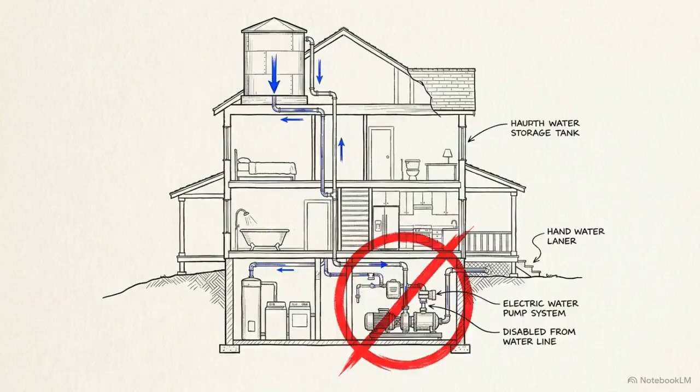When you use a gravity-fed water system, you aren't relying on an electric pump. You're relying entirely on the raw physical weight of falling water to do the work. This setup runs on energy stored by height.

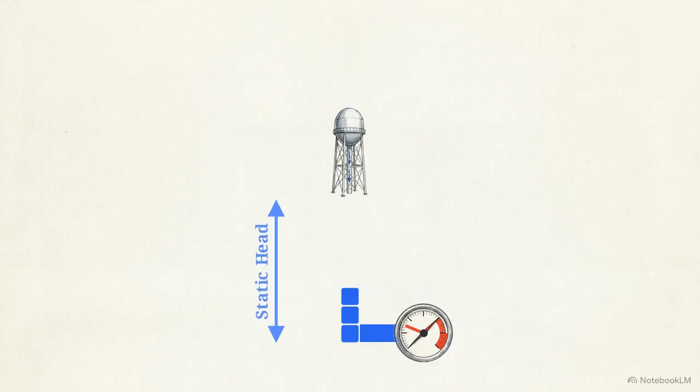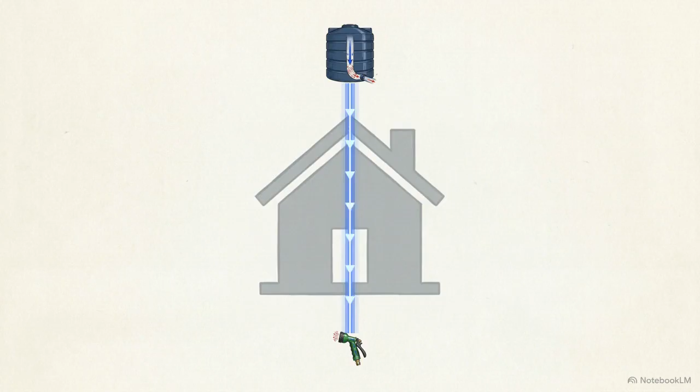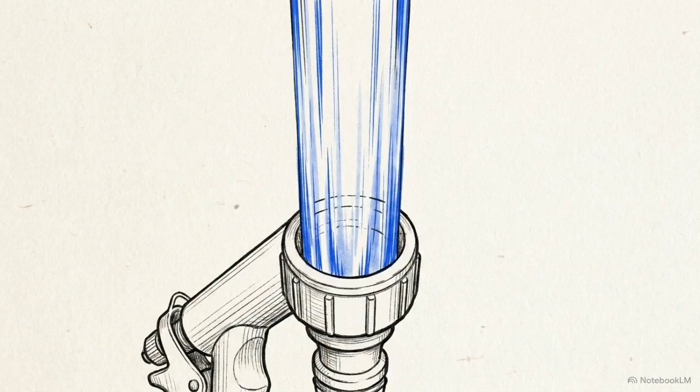The higher you place your water tank, the more heavy water stacks up inside the line, which means more pressure at the bottom. In a perfect world, your plumbing would be a single, perfectly straight vertical pipe dropping directly from that roof tank down to your garden hose. In that uninterrupted straight-line state, gravity acts as a flawless engine, delivering the most water pressure possible right to your destination.

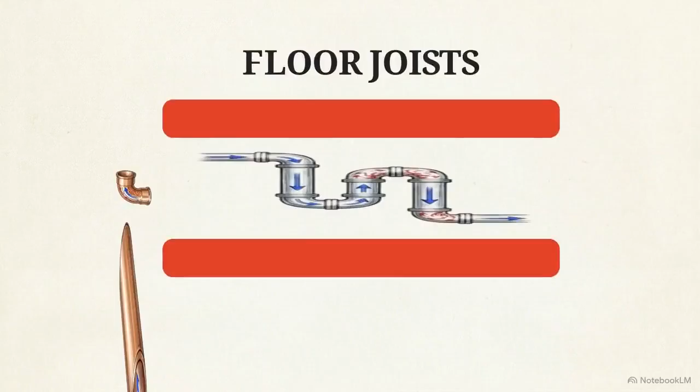But our homes aren't built in perfect vertical lines. To get water where it needs to go, pipes have to navigate around walls, dodge under foundations, and snake through tight spaces. To navigate these obstacles, we use a standard 90-degree pipe elbow, the universal solution for turning a corner.

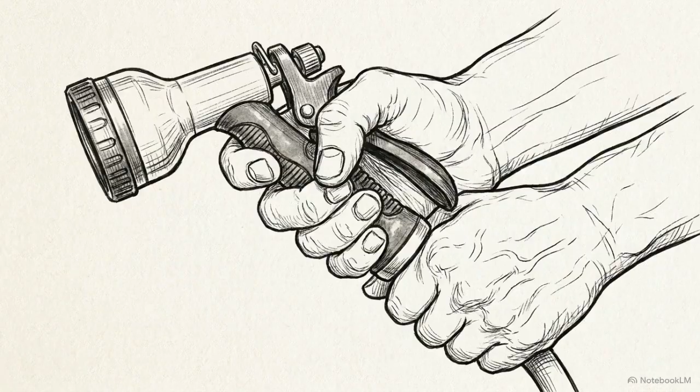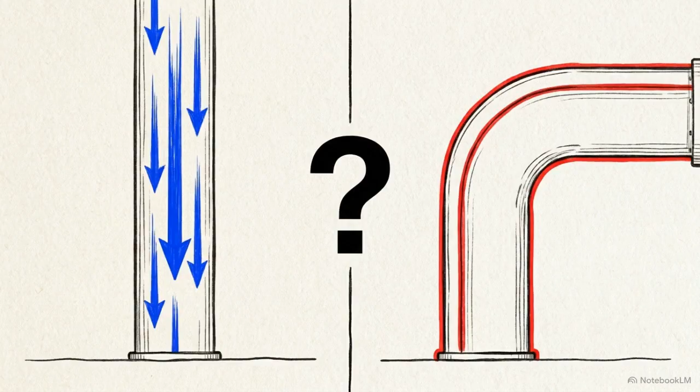And we've all experienced the frustrating result. You have a full tank of water on the roof, but by the time you actually open the hose, that pressure has vanished, leaving only a weak trickle. Why does the powerful engine of gravity suddenly fail us just because a pipe takes a turn?

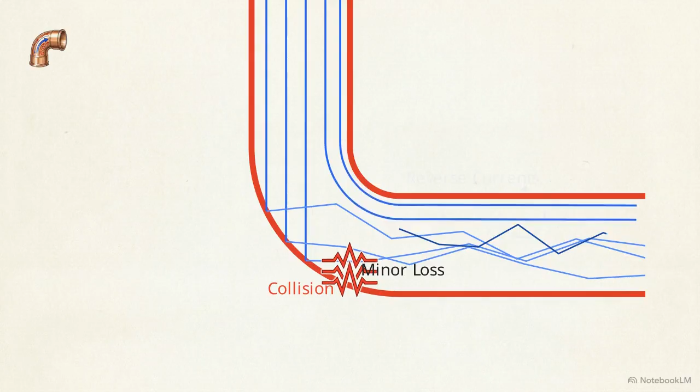Inside a 90-degree elbow, water flows rapidly toward a sharp corner. It cannot bend smoothly. Momentum carries it forward until it violently slams the outer wall. This crash creates turbulence. Water breaks into swirling eddies and reverse currents that actively fight the incoming flow.

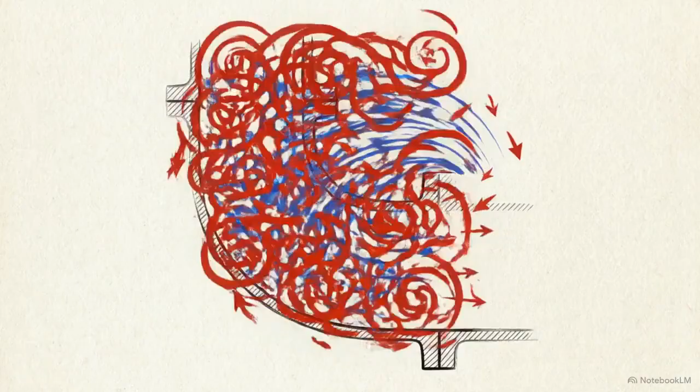Imagine driving on a fast-moving highway and being forced to make a sharp 90-degree turn onto a narrow city street. You have to slam on your brakes. A 90-degree elbow is a friction-generating braking zone. It actively consumes the energy the water spent falling from the roof, robbing it of its speed.

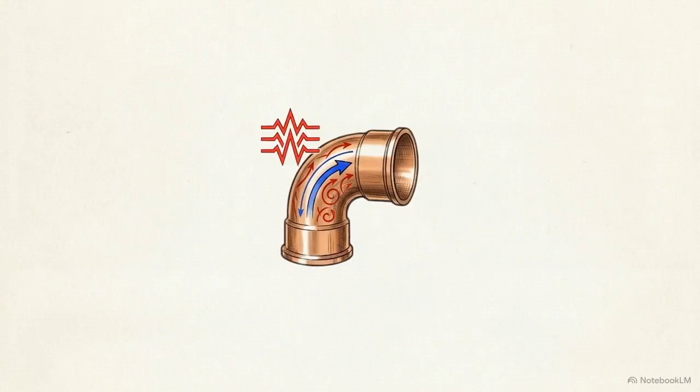There is a way to picture this loss by comparing it to a straight path. We call this the equivalent length. It works by taking the energy lost in just one turn and stretching it out, transforming that single elbow into a long, straight stretch of pipe.

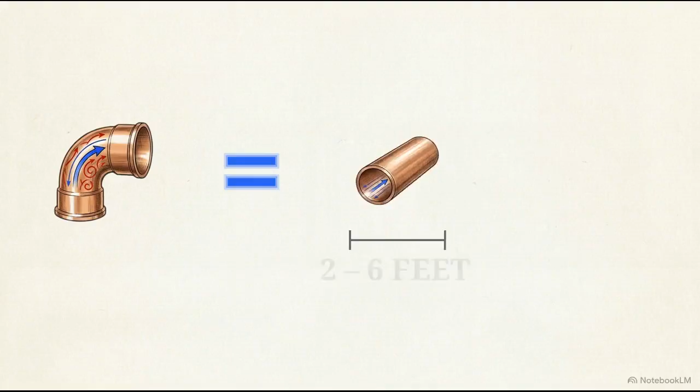Depending on the size of your pipes, passing through a single 90-degree turn is the same as traveling through 2 to 6 extra feet of straight pipe. Every elbow you install adds invisible pipe to your system, forcing gravity to push the water much further than the actual distance suggests.

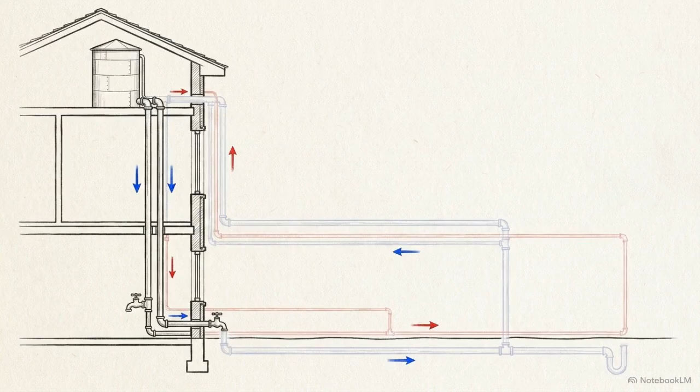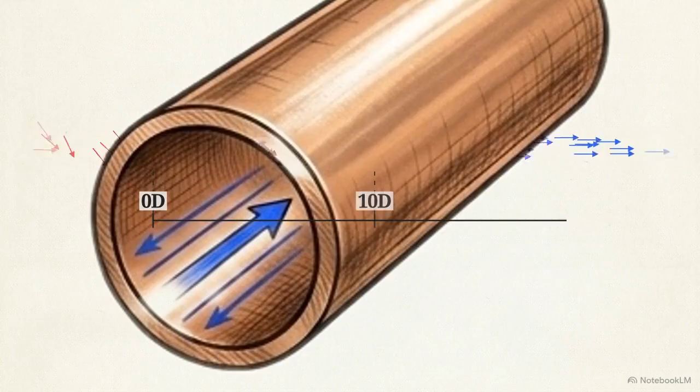After exiting an elbow, the water is a complete mess. It needs a long stretch of straight pipe, often 10 to 20 times the width of the pipe itself, just to calm down and regain a smooth flow.

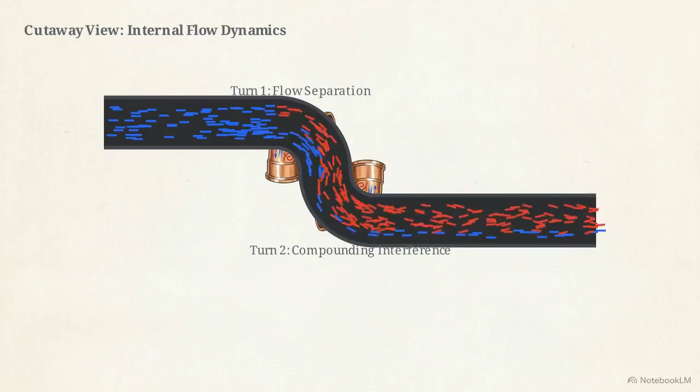But because space is tight, we often stack multiple 90-degree elbows right next to each other. When turbulent water hits a second elbow before it has time to recover, the chaos from the first turn feeds directly into the next, exploding into massive swirling currents that block the pipe.

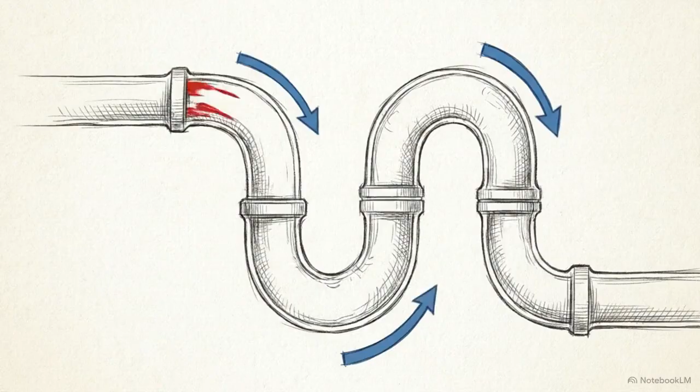This is a multi-car pileup in your plumbing. The water is constantly braking for the next turn and never gets a chance to pick up speed. Stacked elbows turn a series of small disruptions into one massive blockage that bleeds the gravity engine dry.

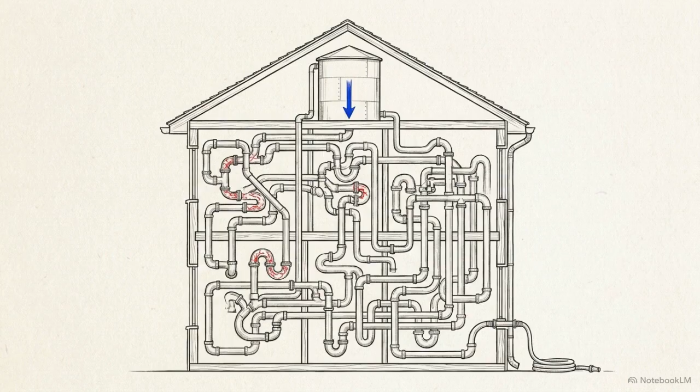Let's zoom out and look at a realistic home system with a zigzagging maze of elbows routing water down to a garden hose. Physically, the pipe is only 20 feet long, but look what happens when we unfold that maze to reveal the actual water flow reality.

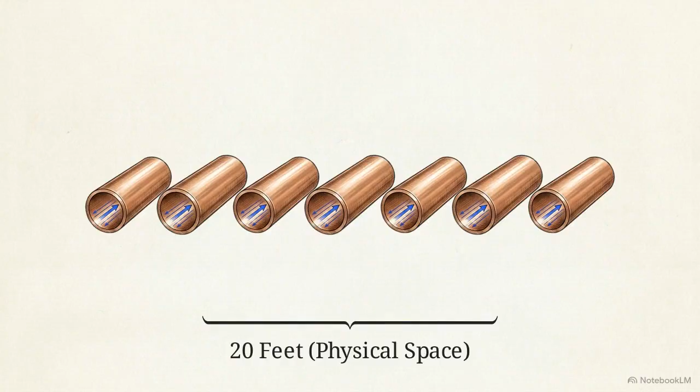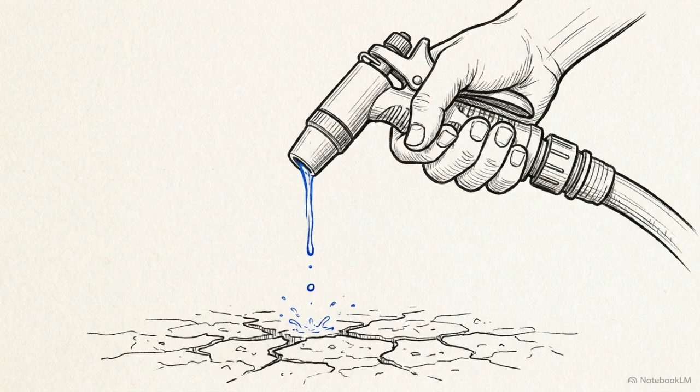That zigzagging layout stretches out from a short 20-foot segment into a massive 150-foot obstacle course. That weak trickle at your hose makes sense now. The limited weight of the water in your roof tank isn't strong enough to push through 150 feet of invisible friction. To keep your pressure, you have to design a system that works with gravity rather than against it.

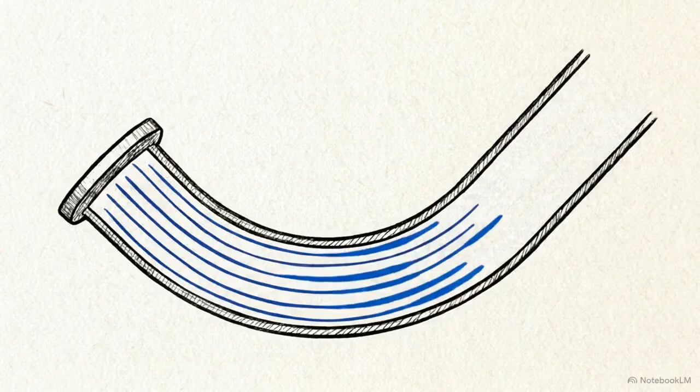Whenever you have the space, replace those sharp elbows with gentle, sweeping curves. As you see here, the water glides effortlessly through the turn, keeping its speed and momentum. And when sharp turns are unavoidable, keep them far apart, giving the water plenty of straight pipe to recover and smooth itself out.

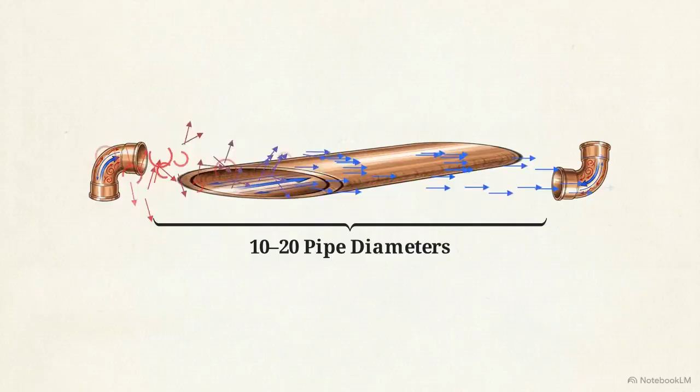When gravity is your only engine, protecting your pressure means keeping the highway clear and avoiding the invisible plumbing traffic jam.